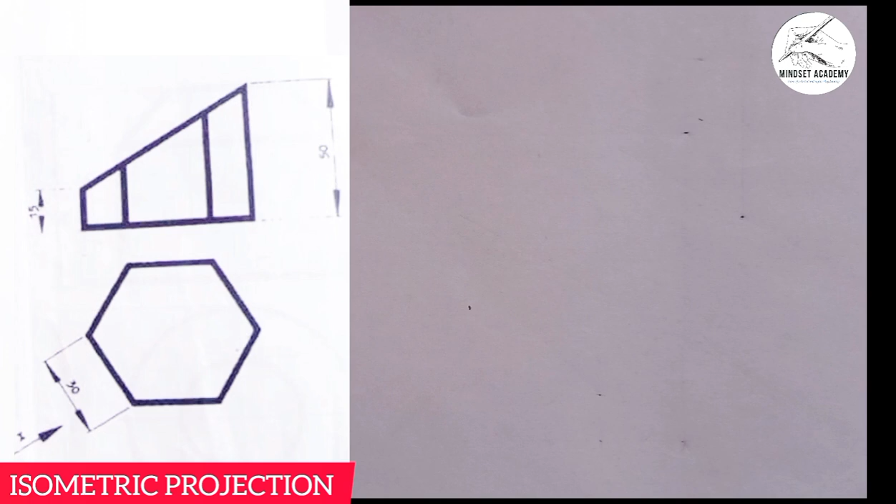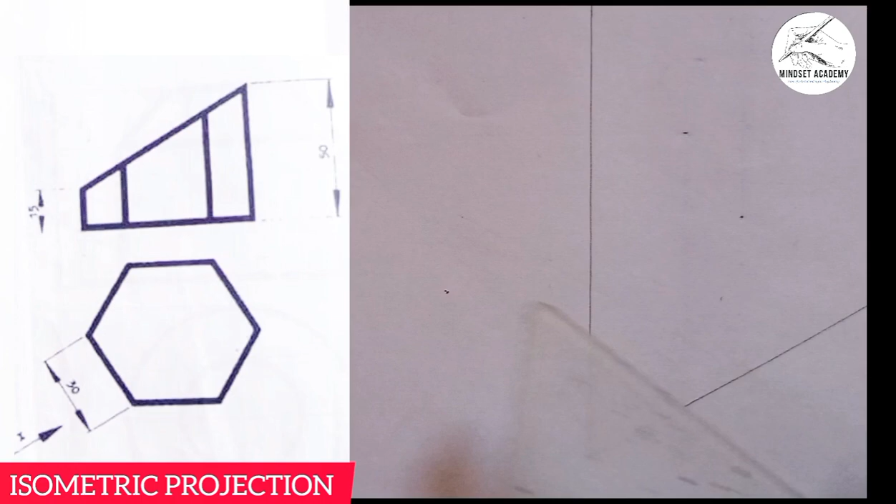When you hear the word isometric projection, the first thing you have to do is draw your isometric axis. You take your instrument and draw your vertical axis this way, and the horizontal this way, representing the two inclined axes, which can either be your x or your z axis.

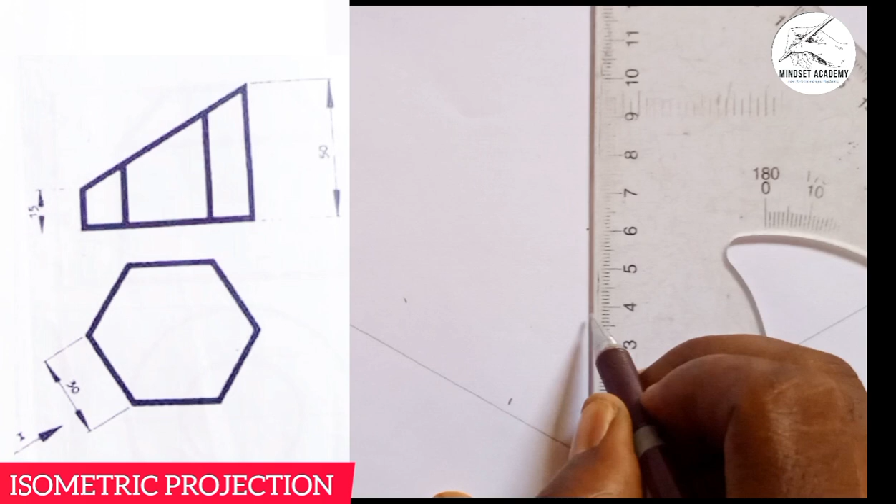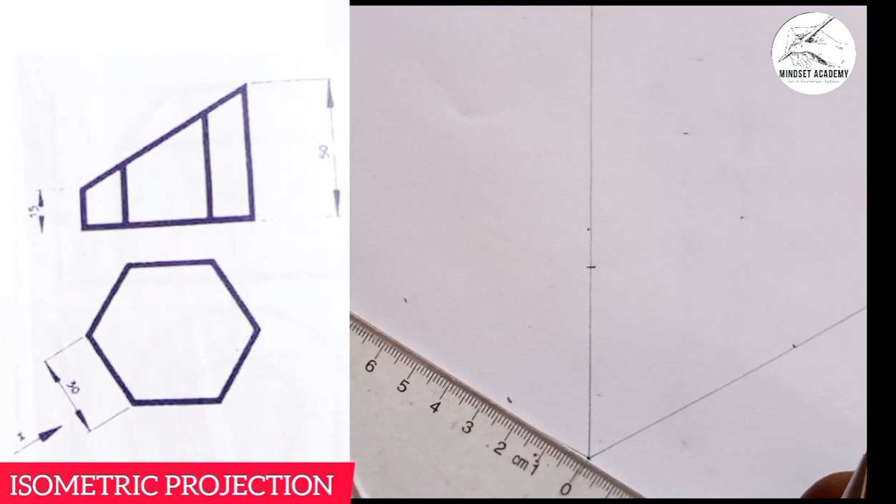Now you measure your total height here to be 50, so from 0 to 5 is 50. Then the width here, since it is hexagonal in shape and we're giving one side to be 30, meaning the diameter is 60. So you measure 60 on both sides, from 0 to 60 here, and also 0 to 60 here.

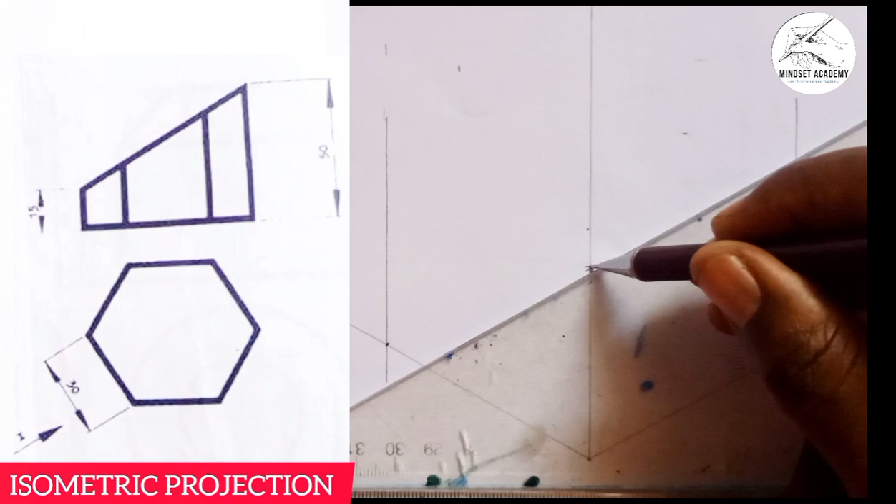Then you make it form your box in this fashion. You come, this is going up, this is also going up. You close it up, and also close it up too, and do the same thing here, and the same thing here. This is what we come out with.

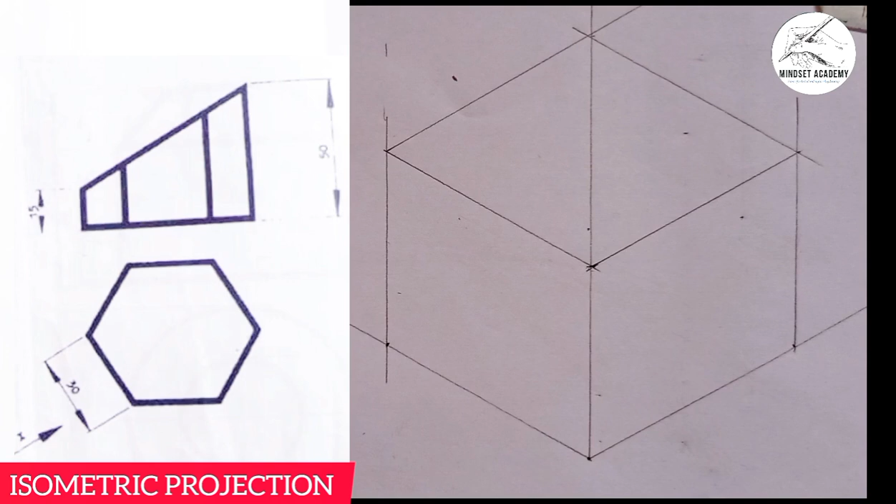So from here we'll carve out our image. Now the thickness, the height here is given to be 15, so I'm going to measure 15 here, from 0 to 15. But since I am using my instrument, I don't have to measure 15, 15, 15 separately. I'll just use my instrument to draw parallel lines. This is 15 here.

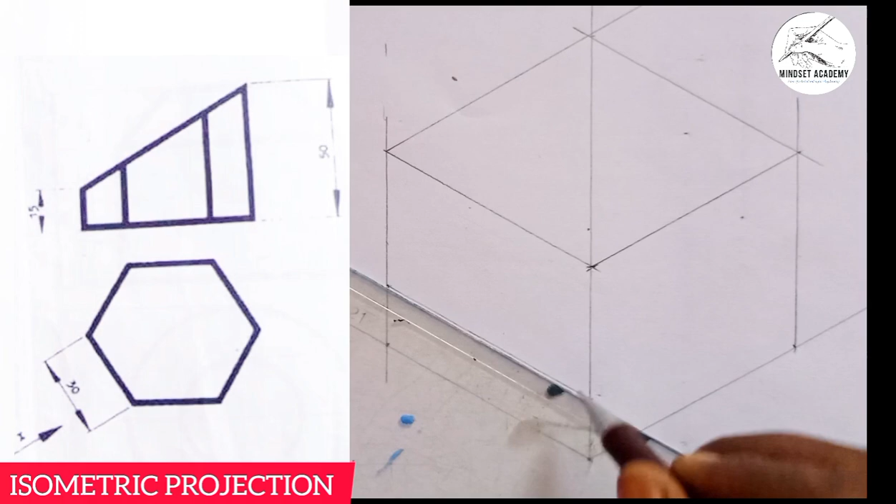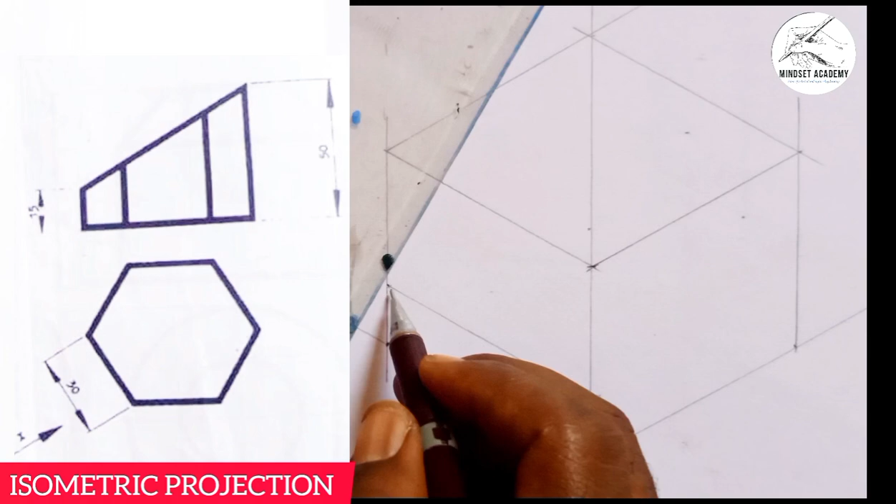Since it is facing this side, what I will simply do here is connect this point to this point here, and this point to this point here, so I should be able to complete the base here and also here. With the help of my instrument, I am going to draw a hexagon here across flat.

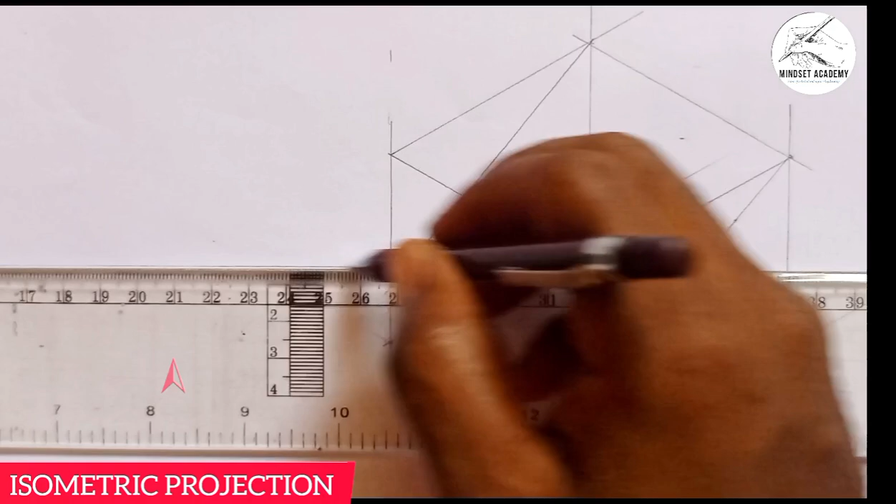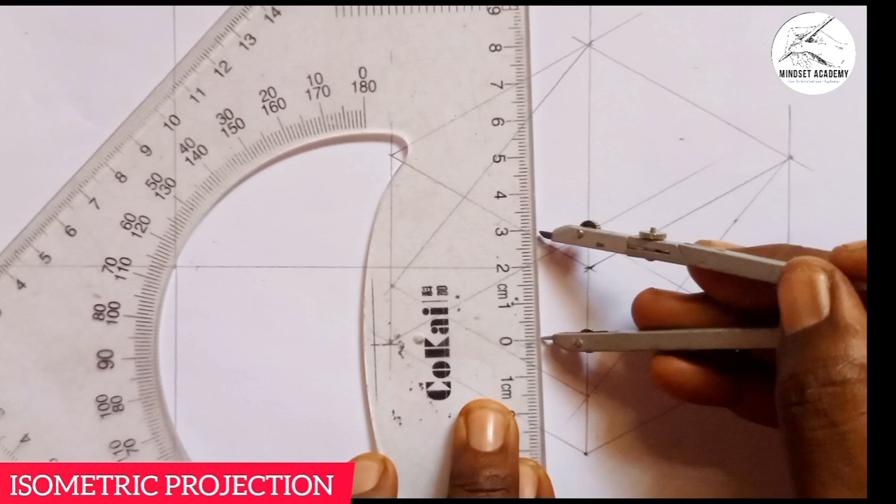If you look at the plan, it is hexagonal in shape, so I'll draw a hexagon across flat. You draw the horizontal this way, and you draw the vertical this way, and they meet at this point. You take the radius of that circle, and just take it that way, from 0 to 30, 0 to 30, and place it here.

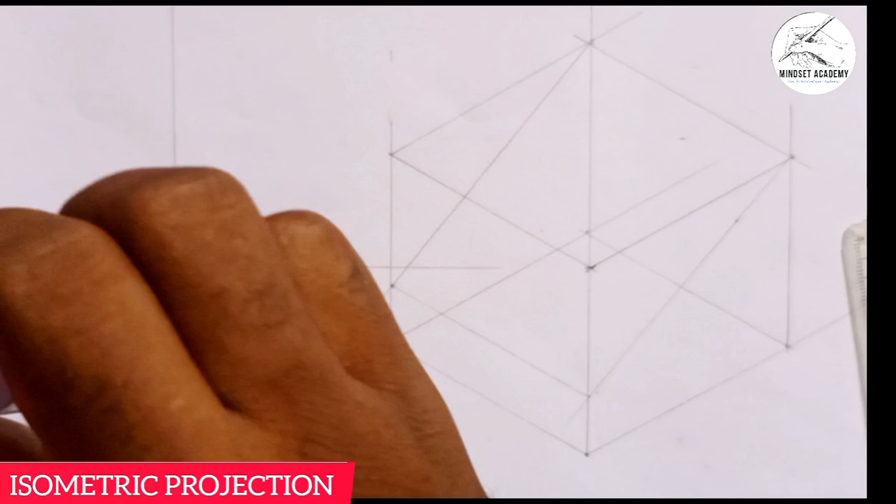You draw your circle. This is what we used to draw the circle here. So once you've done that, you just use your instrument here and draw your across flat here.

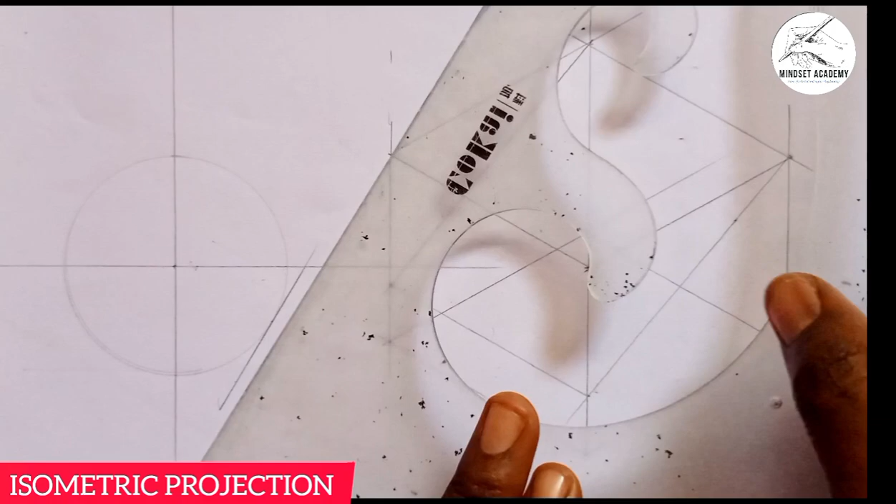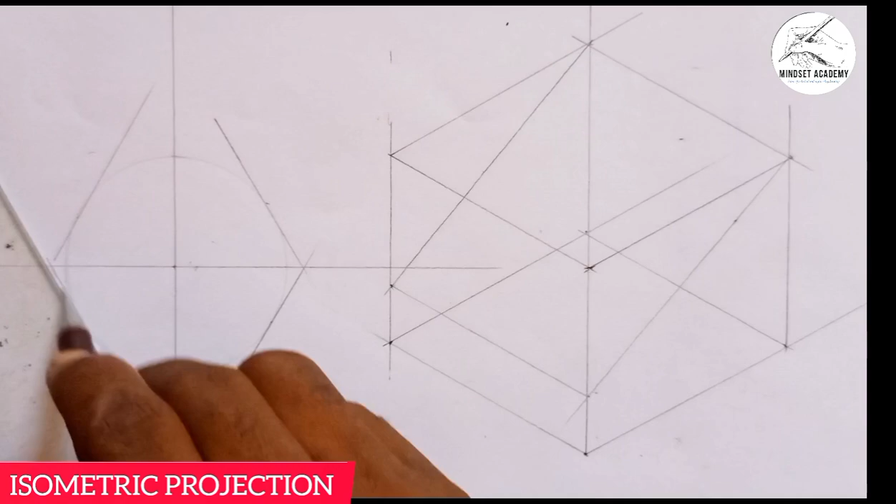So from here, you do this, and you take it up from here. Do this. You do the same thing here too, and the same thing here too. You do this, and you close it up, and you close it up. So you can use this to form a box.

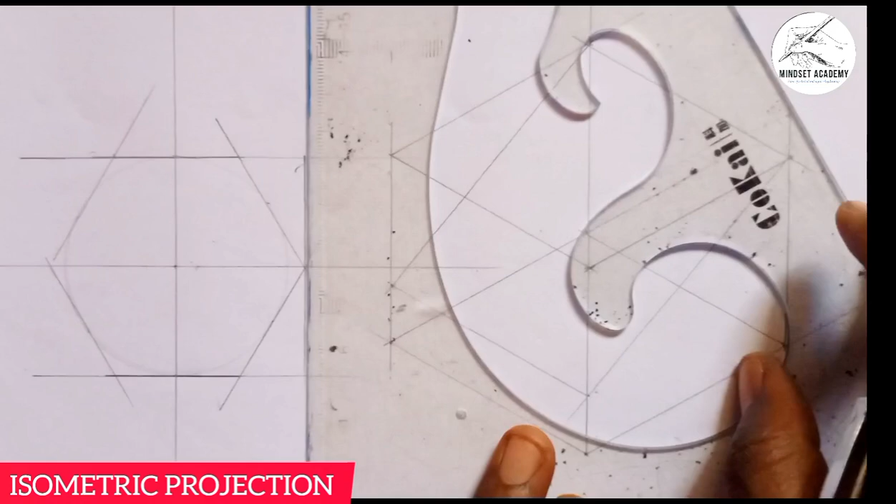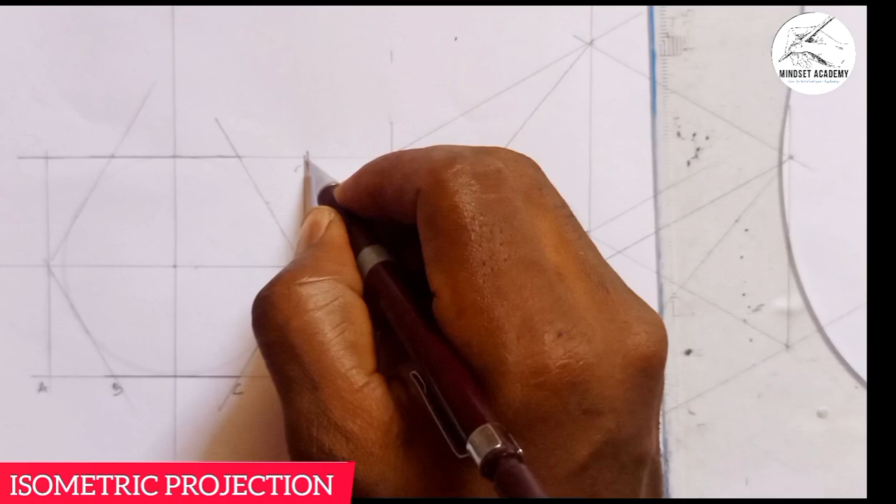So I can call it to be A, B, C, D, E, F, G, H, I, and J.

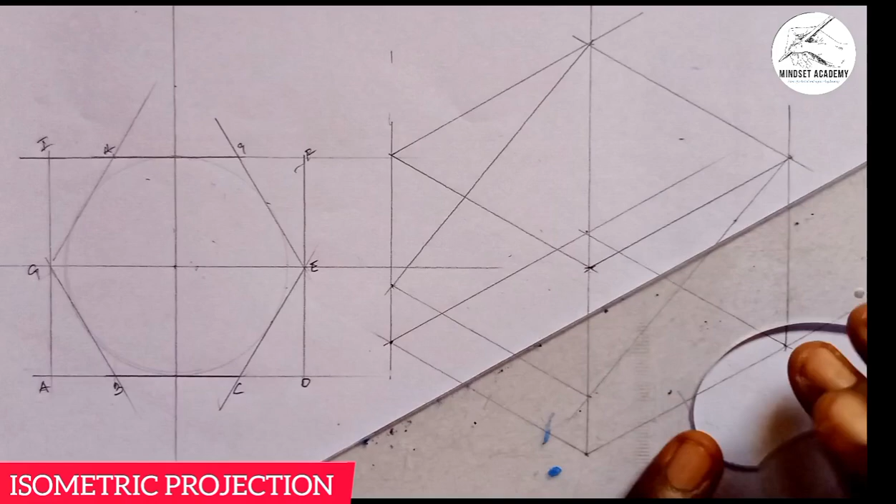So once you've done that, you can just go from here to here, from here to here, the center, and here also. So I can easily just complete that, and complete this too.

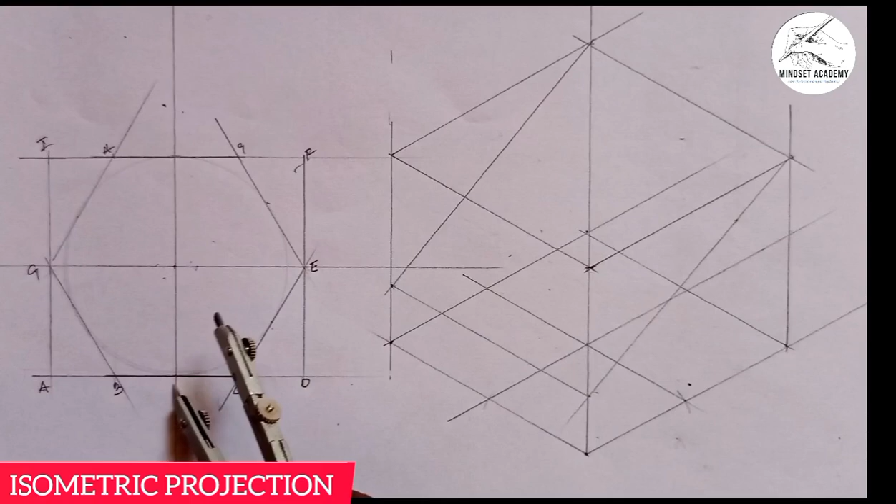So if here, since what I'm having here, the two sides we're looking at here is pointed, so it will be at this point or this point. So it can come from this point here to this point. I'll come here, mark down and up. Come here also, mark down and up.

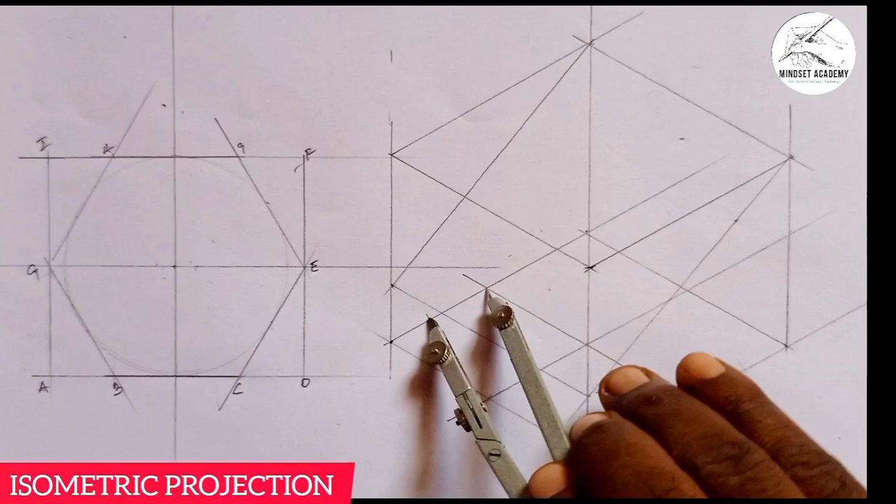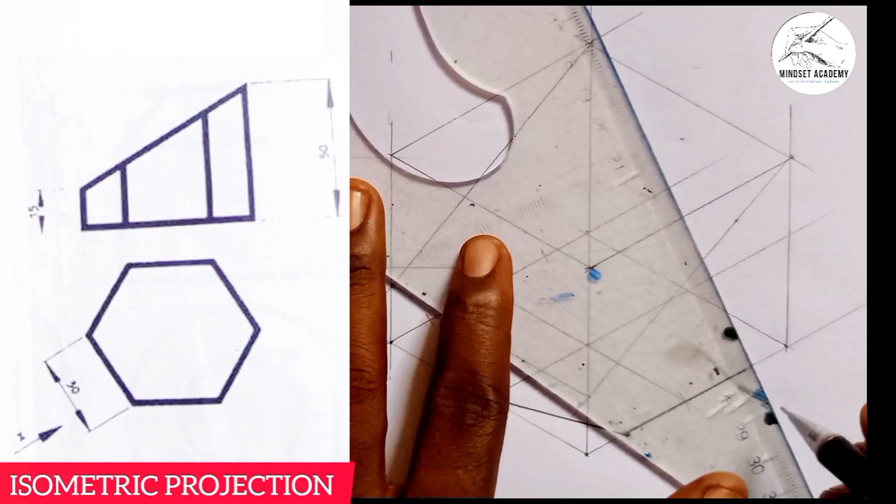So I can now use my instrument and connect here to here, and also here to here. And also here I'll be using a faint line. Then here also I'll be using a faint line. Then here also I'll be using a faint line.

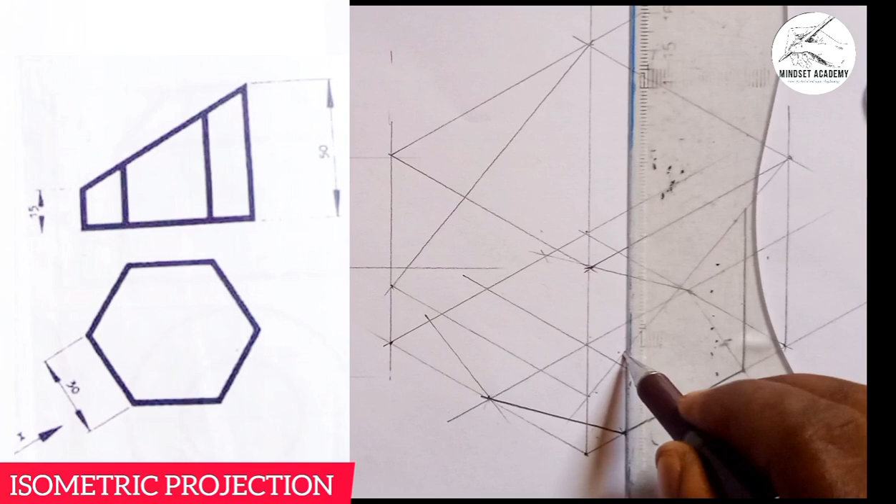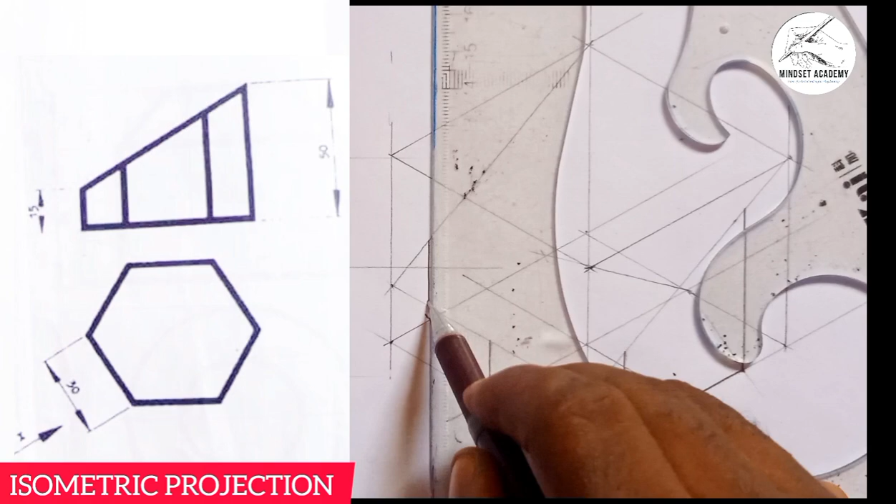So what I'll simply do is take here up to touch here. As my arrow is pointing here, this line, I'll take it up to touch here. Then I'll take it up to touch this line, the thickness I measured earlier. Then here it's coming up here to touch here, but it will not show. To show, from here I'm coming here to touch here.

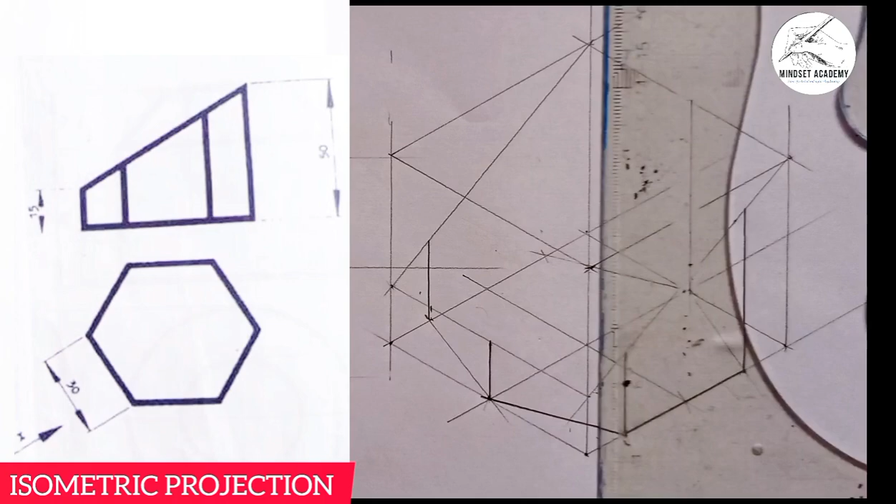Then the next thing I'm going to do is start joining them together. So the back here goes up to touch here, but sorry, it will not come out fully, that will be a faint line. I'll come here too, do the same thing here too, take your faint line to touch here.

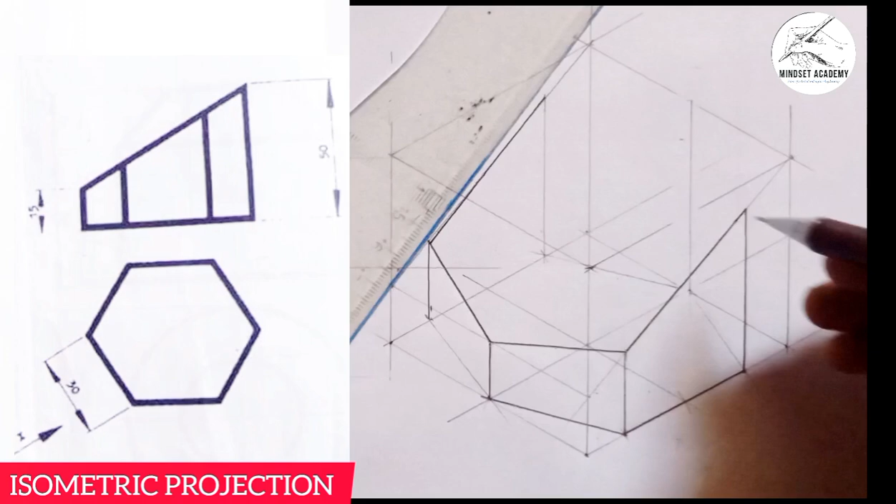So I'll now use my instrument and start joining those points together. From here, straight down here. From here, straight down here. From here, straight down here. Then from here, coming straight down here. And from here, straight down here. And from here, straight down here.

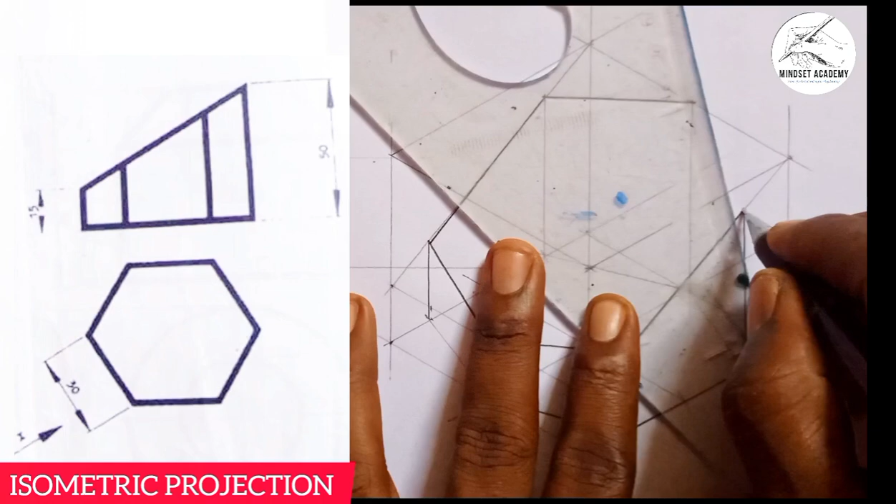Then I'm ticking here too. So this is what we have. So ticking here too is already there. So ticking, this is what we have. You can't see the other one here, so that's why we didn't place them there. It's a solid figure, it is not hollow.